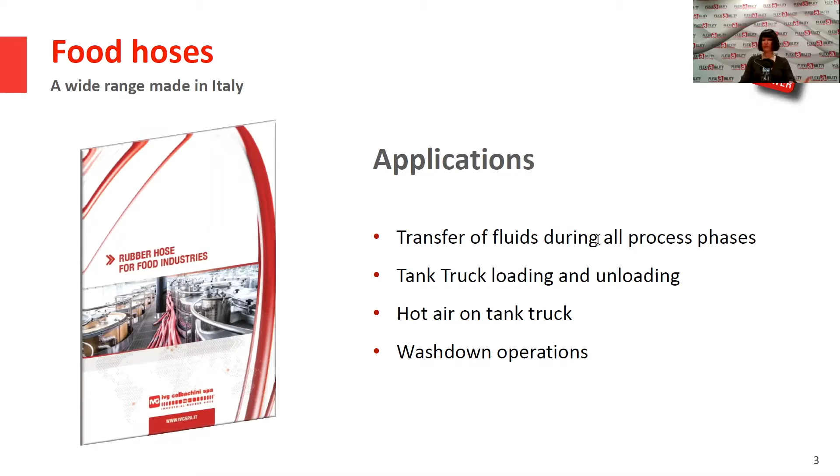We manufacture food hoses on mandrel for any kind of fluid and in all process plants. This means not only in production sites but also in tank truck loading and unloading. We also manufacture hot air hoses for tank truck wash-down operations and any other requests you may have.

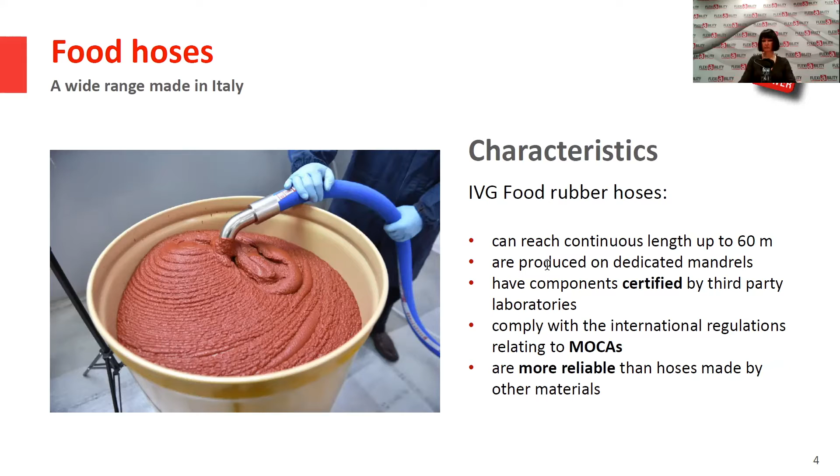Our hoses are manufactured on dedicated mandrels in a dedicated production department, which is very important because we can guarantee compounds certified by third-party laboratories complying with food regulations worldwide. Having a dedicated production department also means we can guarantee 100% traceability specific to this kind of hose, which is very important for food hoses.

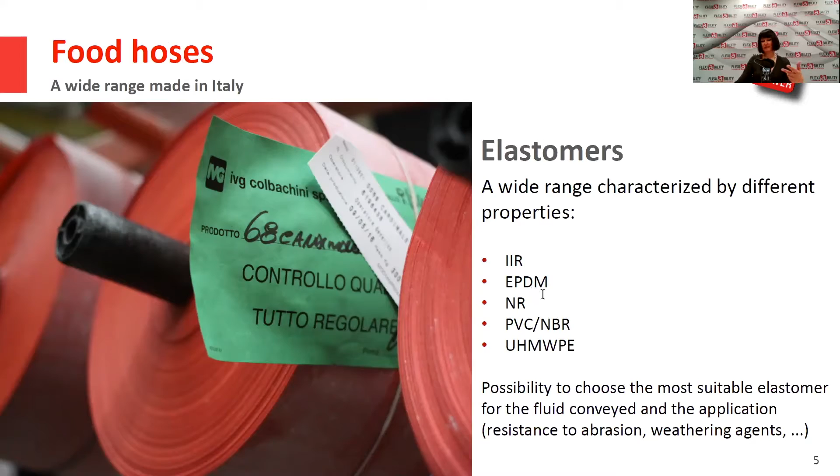We manufacture hoses with butyl, EPDM, NBR lining, and ultra-high molecular weight materials, among others. This depends on your needs, the applications, the temperature, and outside conditions such as abrasion resistance or weathering resistance. We normally talk about fluid conveyed, but the place where the hose is used is also important, as strong abrasion or weathering on the cover can cause problems later on.

Now let's go specific to cellar hoses, which are really top hoses for IVG within the family of food hoses. This is due to the fact that Italy, but also France and Spain, cover around 50% of wine production worldwide, which is a really important factor for us.

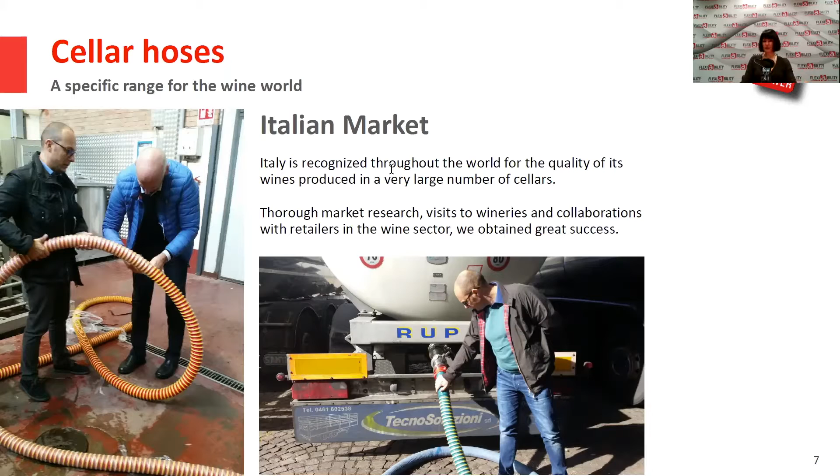We started from the Italian market, as it's right out the door, and there are an incredible number of cellars and vineyards in Italy. So we visited them and talked with the operators, and the most important thing we did was listen to their requirements and needs. Operators can have different needs, enologists others, cellarmen others, so it's really important to understand what they want.

In cellar applications there are many possibilities, as you can use hoses to transfer must, wine, during bottling operations, in the cellar, and others.

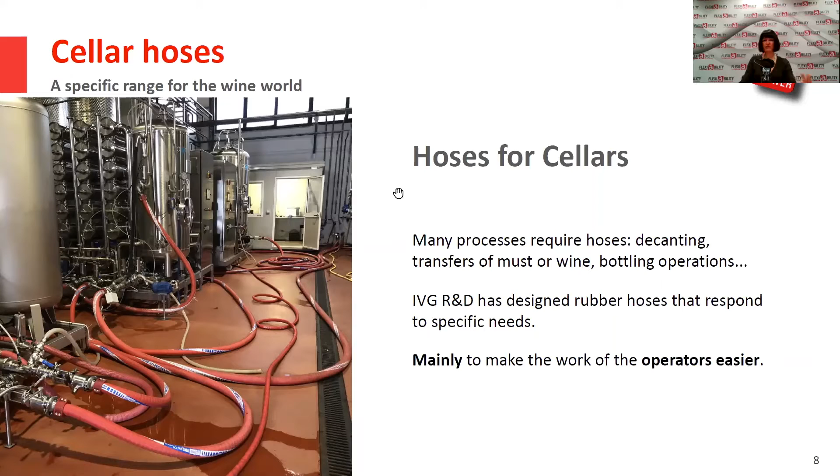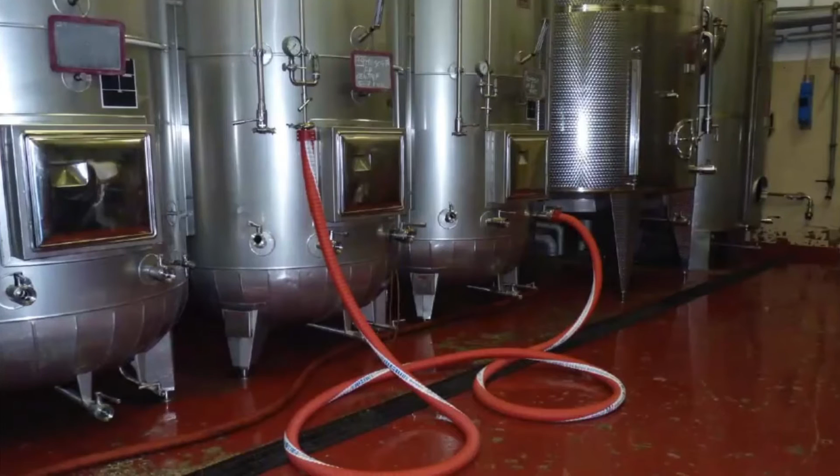Going back to the specific needs of the operators, let's say that the cellarman looked mainly at light weight, flexibility, handling, and stock availability. Why? Because they wanted a hose easy to move, to handle, and they wanted a hose ready immediately, without waiting, without wasting time.

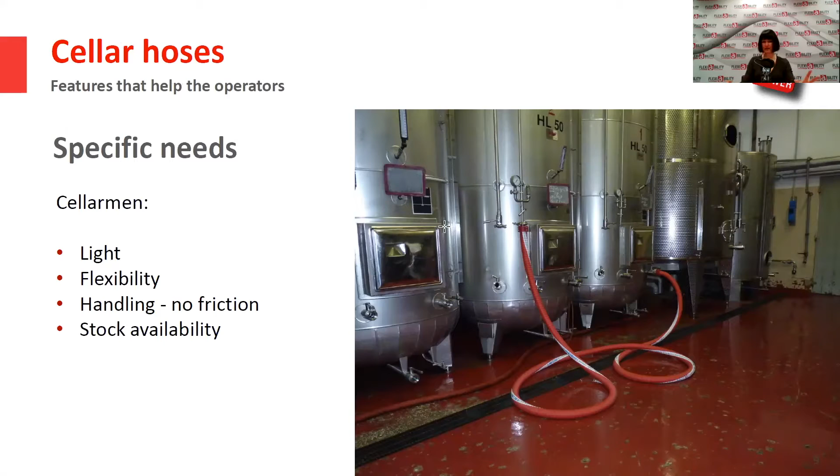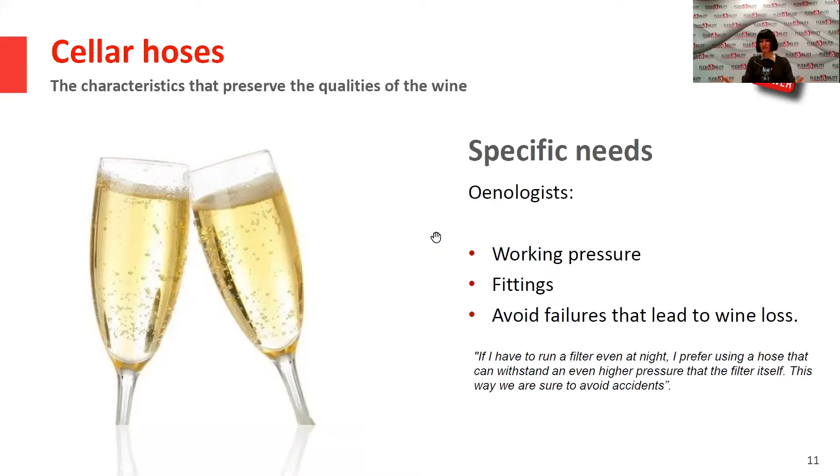While the enologists were looking mainly at food certifications, as they wanted hoses with no release of chemical substances from the lining, being tasteless and odorless. And not only this, they also wanted a hose withstanding a higher working pressure than that of the pump or the filter, and having a good fitting system. This is to avoid any failure during production, as any failure means wine loss. And this is something nobody would like to have.

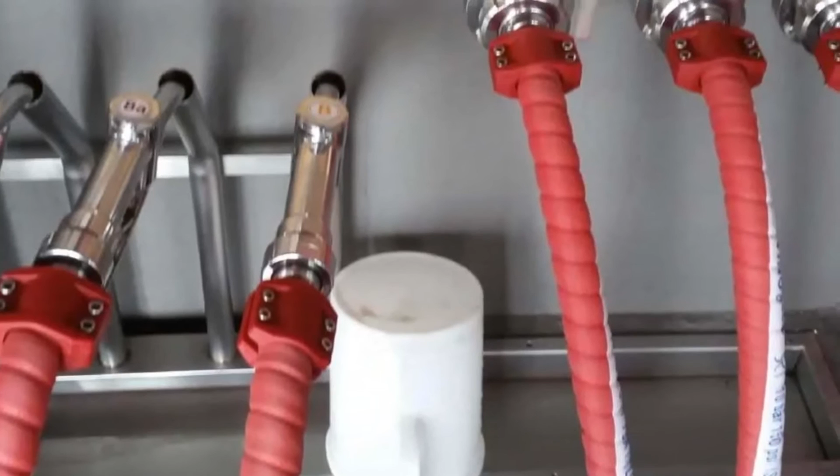So IVG, thinking about cellars and wineries, dedicated all its efforts to develop two hoses. One is Vinoflex Easy. Vinoflex Easy is mainly used in indoor service, as it has a low friction thermoplastic corrugated cover, which allows the operator to move it on the ground in the cellar without any problem, without any fatigue. It's really flexible, it's light, and it glides really easily with no force.

And let me say that the fact that it has a thermoplastic cover also helps the hose to remain clean, as a hose that is clean on the outside is very important. It's nice to see, and it really gives the sensation of something pure.

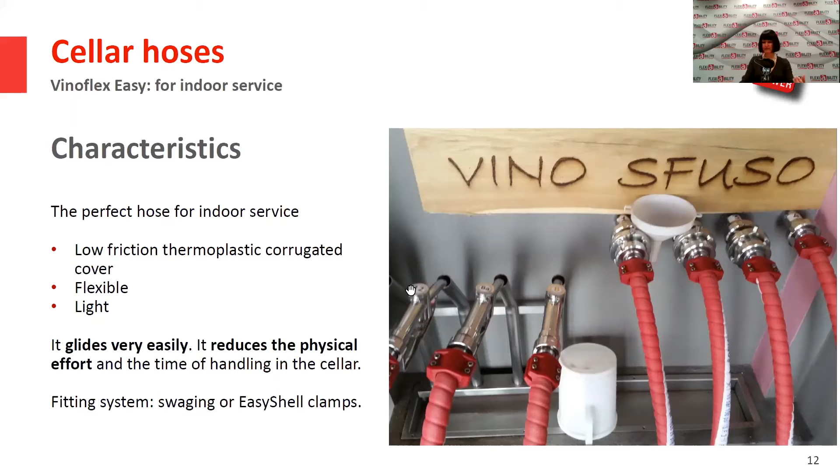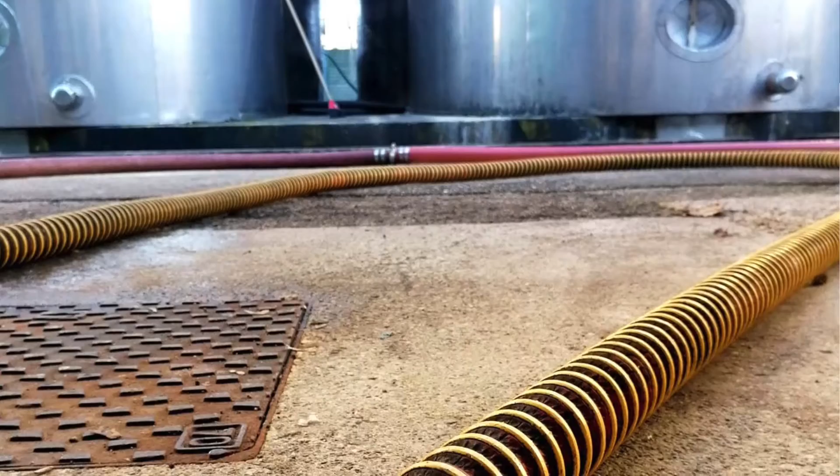And the other hose, which is used outdoors, is Tuscany. Tuscany is, as we have called it, the perfect hose for outdoor service. The cover is always in thermoplastic material, but it has an external thermoplastic spiral. This allows the operator to move it easily, reducing any force, and it is ideal for any kind of surface, even when the surface is abrasive or bumpy. So you can really move the hose without any twisting, without any knots, avoiding any kink. And it's really appreciated by the operators.

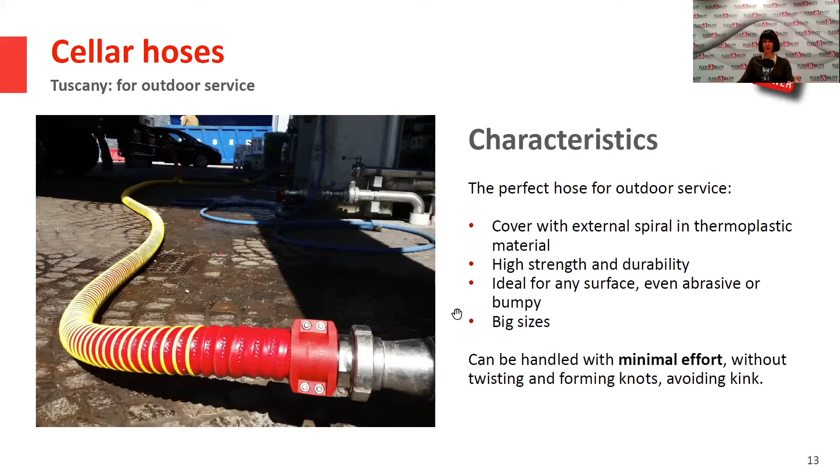Now, I'm very pleased to introduce this interview with Mr. Enrico Ronconi, who is the enologist of the winery Marchesi de Frescobaldi. Marchesi de Frescobaldi is a really important, very old and well-recognized winery in Tuscany. And from the words of Mr. Enrico Ronconi, you will really appreciate the feeling they have with our hoses.

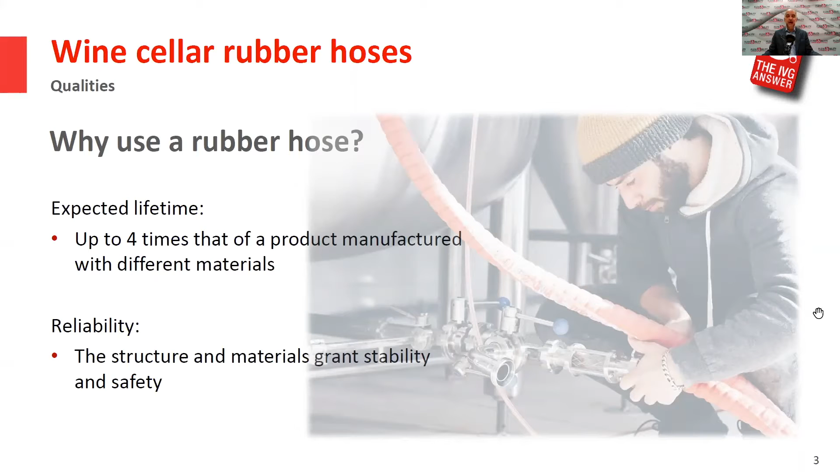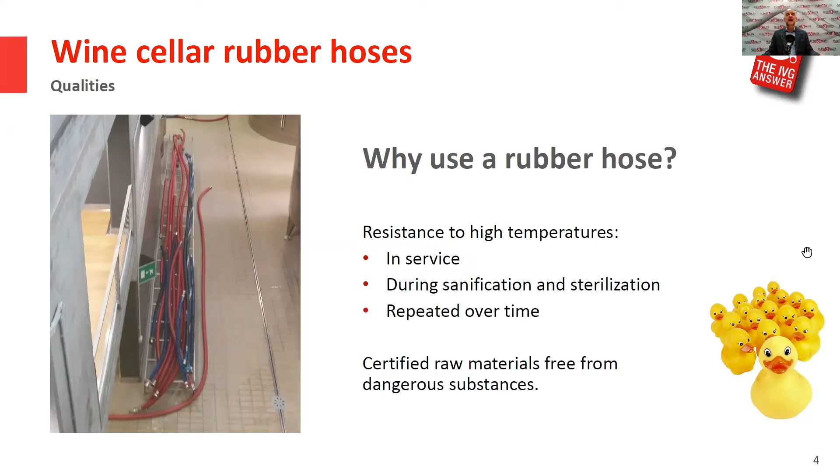There are many reasons to choose a rubber hose. First of all, the fact that it is absolutely free from any dangerous substances, certified by third-party laboratory. But we would like to underline the resistance to high temperatures, in service and during sanification and sterilization. And this resistance is extended over time. So these are not affecting the quality of the product.

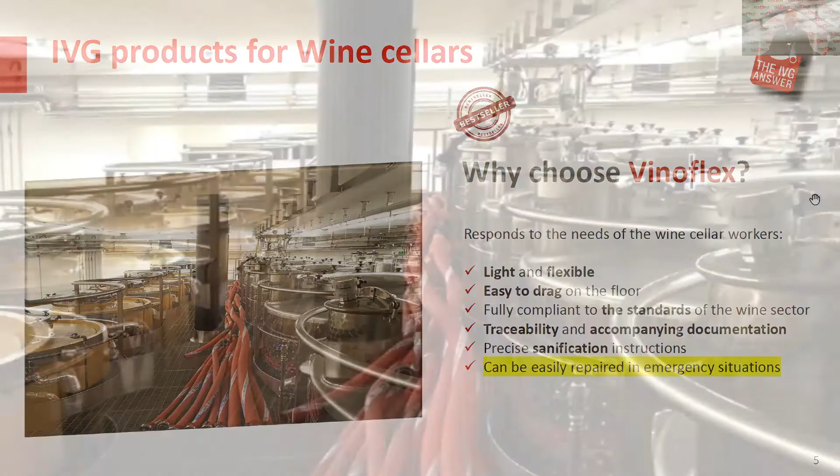Why and where to choose Vinoflex? Probably one of the best-selling products of IVG. The hose has been designed together with the cellar worker to work inside the plant. It is extremely light and flexible, easy to drag on the smooth floors that are available inside the cellar. It fully complies with the international standard required by the wine industry.

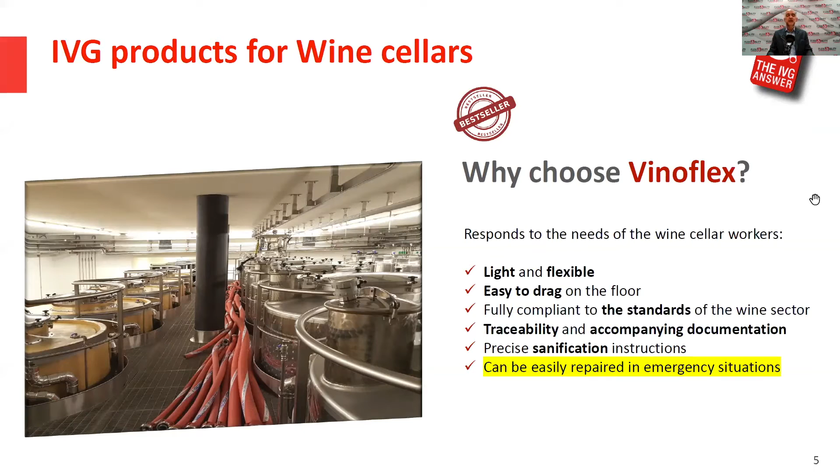It is supplied complete with all the necessary documentation, total traceability, instructions for a correct sanification, and most important, it can be repaired in an emergency on site. This is thanks to the clamping system designed by IVG, Easy Shell. My colleague after me will introduce you to this system.

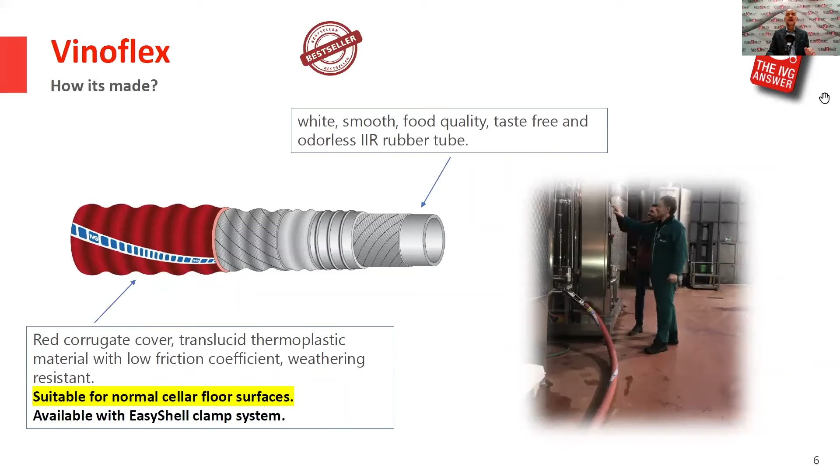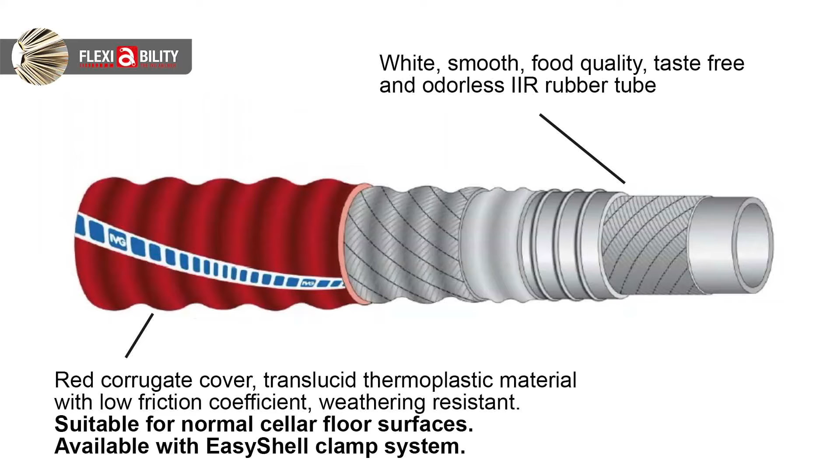How it's made. The hose is made with a first quality butyl rubber lining, absolutely taste-free and odorless. It has an embedded steel helix wire and a corrugated cover with a thermoplastic low-friction material that allows very easy dragging on the floor. It is available, as I said, for the Easy Shell clamping system. You can download the characteristics of the Vinoflex from the IVG website, but we can just give some numbers.

It is designed for a working pressure of up to 10 bar, which makes it suitable to work with autoclave wines that reach a higher pressure. It is extremely flexible. It reaches a bending radius equal to 3 times the inside diameter, and most important, this value can be reached with extremely minimum strength.

It's available in continuous length of 60 meters, and in a range of diameters from 1 inch to 4 inch, the diameters where IVG developed the Easy Shell system. Upon request it can be supplied with natural rubber lining, with different color covers, and with private branding.

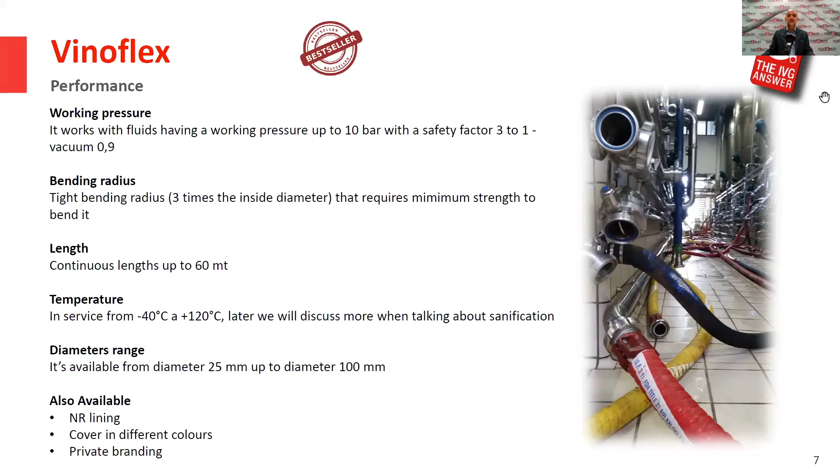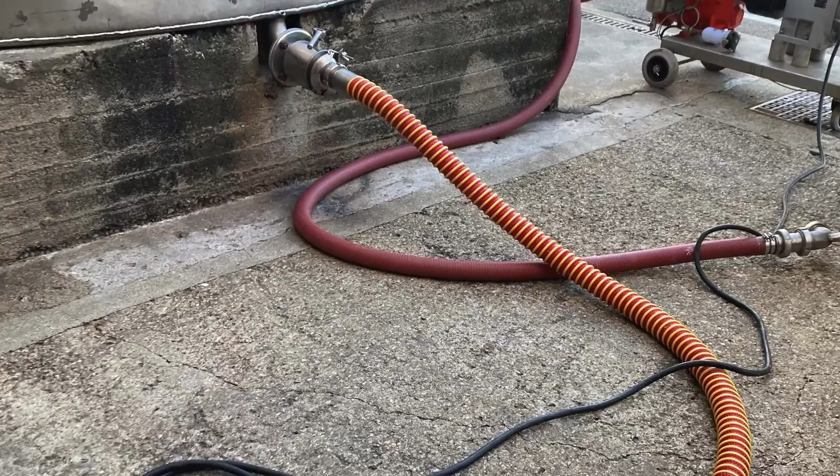The other product that we are talking about today is the Tuscany hose, designed for outdoor service. The hose glides on rough floors, concrete, asphalt, or other material. It's also extremely easy to bend. It's almost impossible to kink or knot. It is extremely light, and like the Vinoflex, supplied in accordance to the standard of the wine sector and with all the necessary documentation.

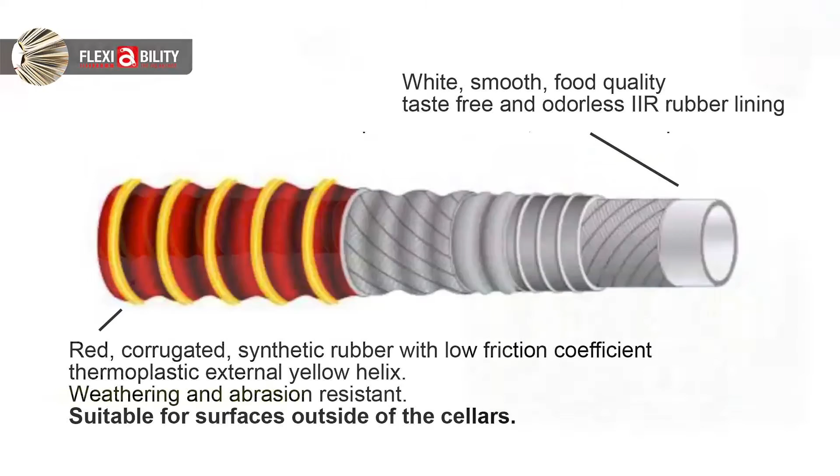This hose is made with a food quality, taste-free and odorless butyl rubber lining, embedded steel helix wire, and an external low-friction thermoplastic helix wire that makes it perfect for outdoor service. This is also suitable for 10 bar working pressure in continuous length up to 60 meters, but upon request, it can be supplied in service length complete with soft ends for easy assembly with any type of coupling and clamps, available, of course, in different colors.

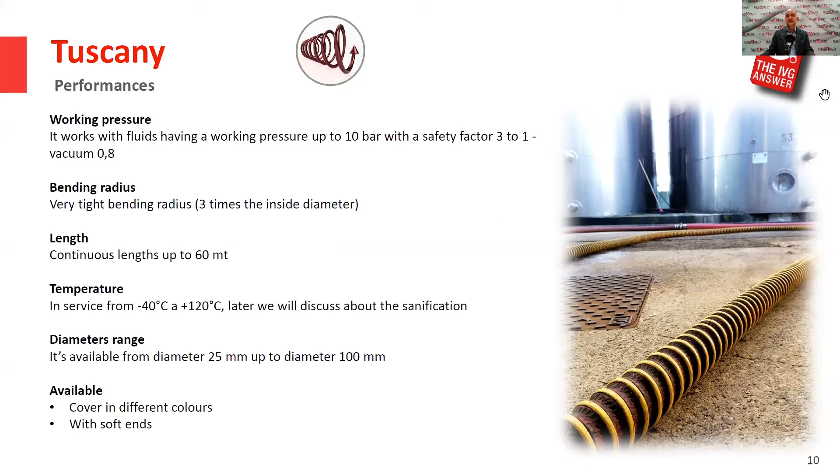Both products are designed in accordance to the international regulations, free from dangerous materials, phthalates, heavy metals, bisphenol, in accordance to international standards like FDA, BfR, Decreto Ministeriale.

An important sector, the cleaning, CIP, can be easily downloaded from the IVG website. If you go to the datasheet of the Venoflex, there is a section that you can download with all the instruction for cleaning and sterilization.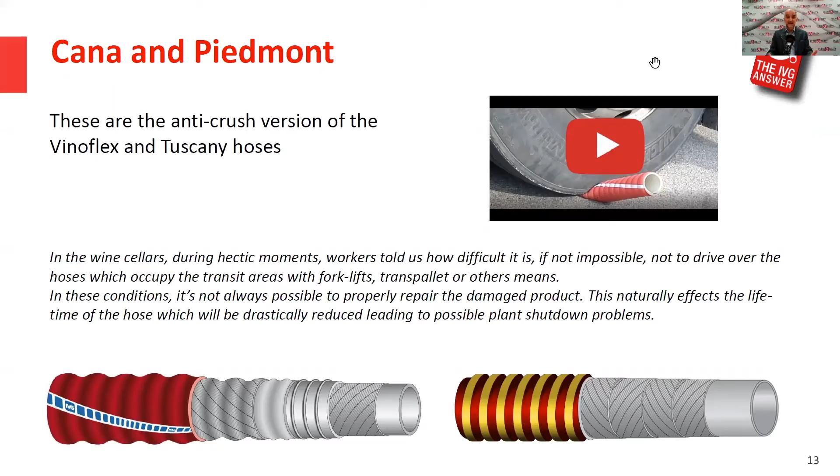Talking with the workers, it has been highlighted the difficulty of working in a cellar and how it's difficult to move in an area full of materials, and how easy it is to drive over the hose with forklift, transpallet trucks or other material, damaging in a way that cannot be repaired the product, causing shutdown of the production and different type of problems.

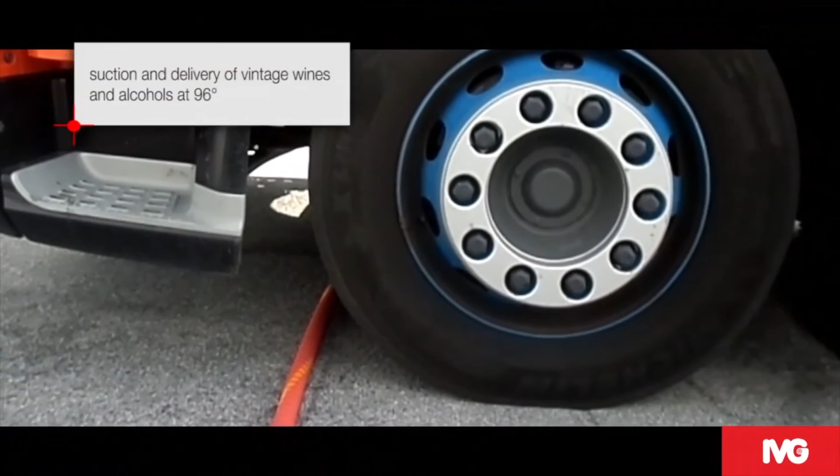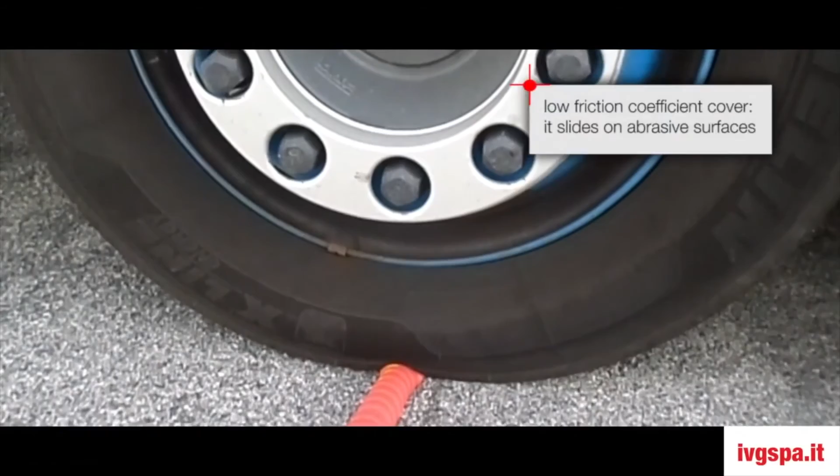For this reason, IVG designed the alternative crush-proof version, Cana, that is the alternative of a Vinoflex, with an embedded thermoplastic crush-proof helix wire, and Piedmont, that is the equivalent of Tuscany without the embedded steel helix wire. So a hose only with external thermoplastic wire that in any case grants resistance to vacuum.

All the characteristics of the product can be downloaded from the IVG website. We invite you to register in the IVG. You can download either the brochure, the data sheet of the product, either through sector, cellar, wash down, and so on, or family, food, hot, or other things.

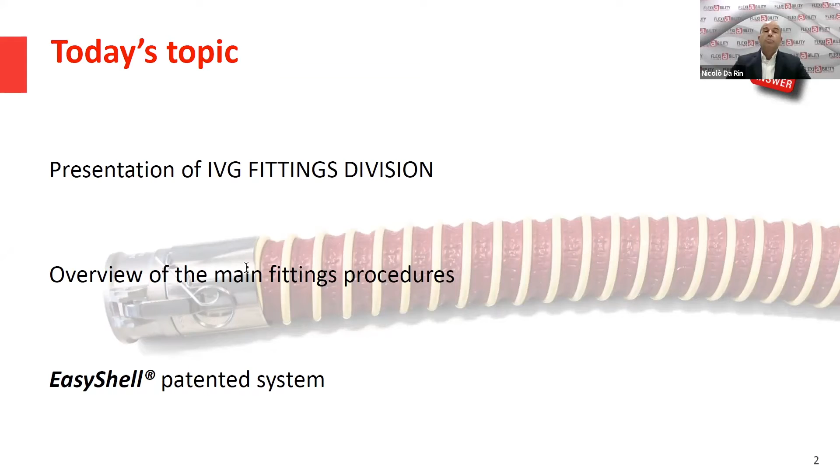The title of today's event is A Good Wine Needs a Good Hose. True, but a good wine needs a good hose with the right sanitary fittings. This is why I'm going to present you our company, Fittings Division. We will also have an overview of the main fitting procedures, and I will also present our EasyShell system.

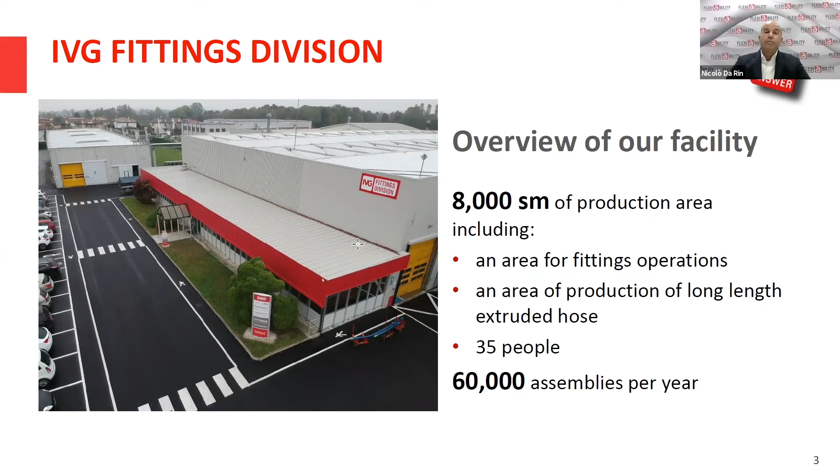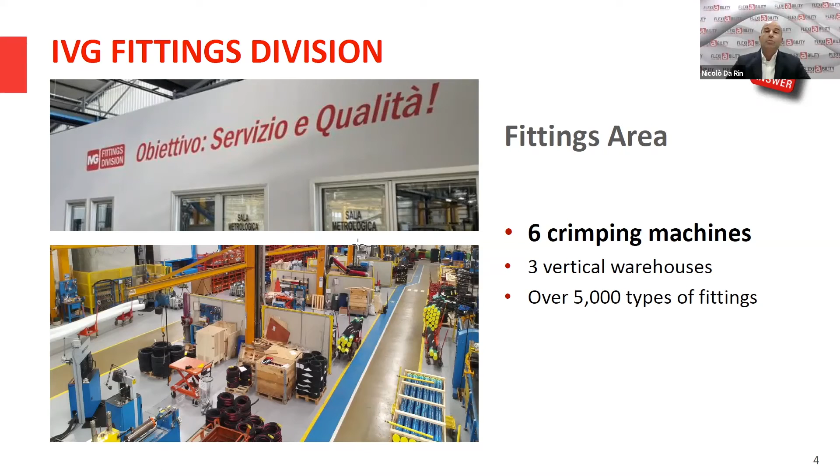Fittings Division covers an area of 8,000 square meters, divided into two main activities: the area for fittings operation and the area for the production of long-length extruded hose, for a total of 35 people. Fittings Division can perform roughly 60,000 assemblies per year. We have 6 crimping machines, and we can crimp from size 6 millimeters to 500 millimeters, so from size 1/4 of an inch to 20 inches. We have 3 vertical warehouses in order to save space, and we can deal with over 5,000 types of fittings.

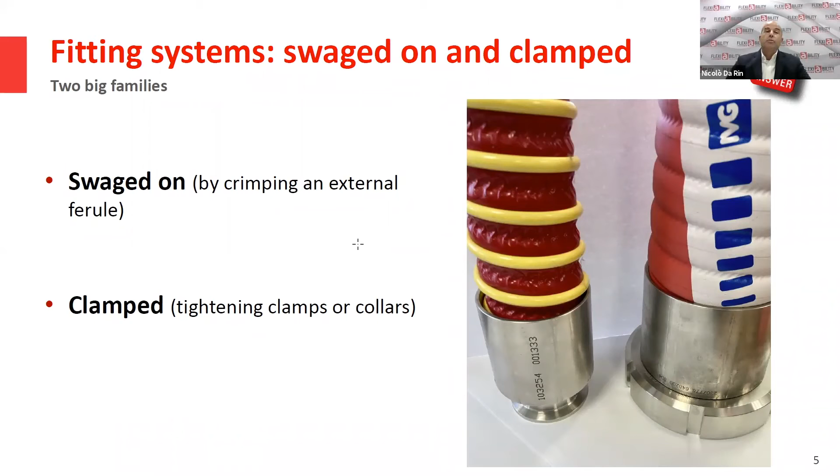I'm going to present you now the 2 main families of fittings. So swaged or crimped by an external ferrule, or clamped by tightening clamps or collars. Swaged: the plus is certainly that it is a permanent system with an external ferrule. It is excellent in case of higher pressures. The minus is certainly it cannot be performed directly by the end user.

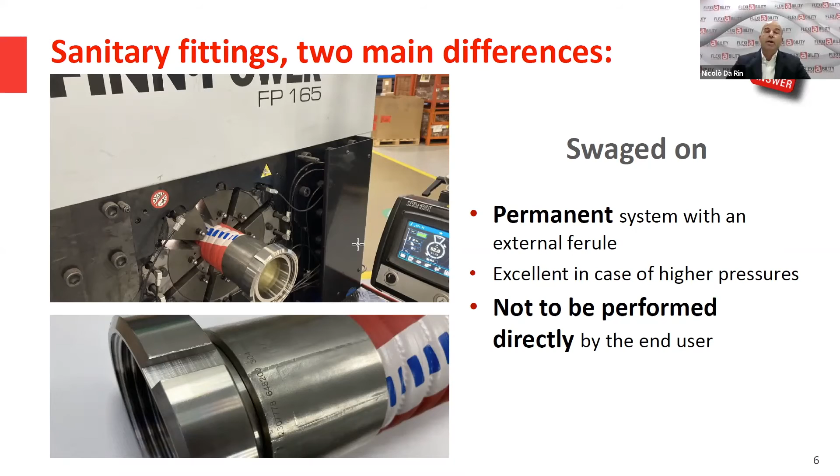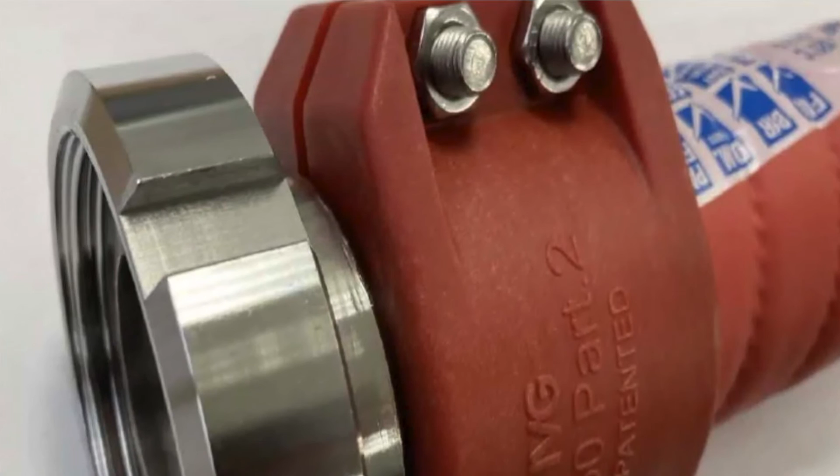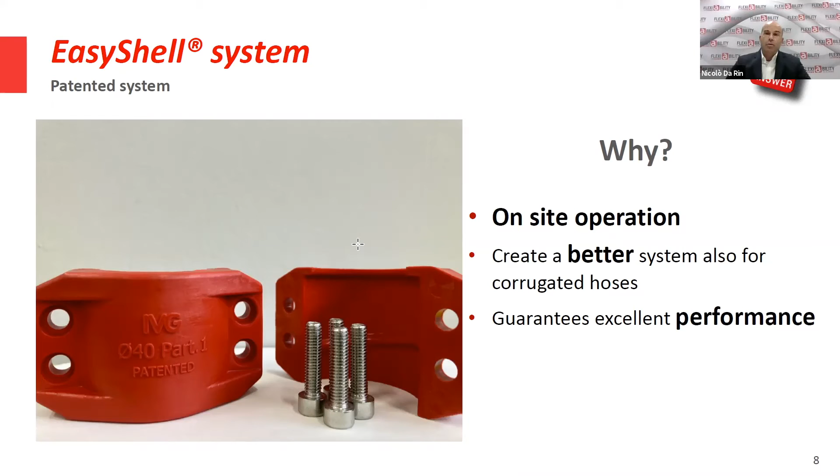Clamped: it is mountable and removable with half shells. It can be performed on site by the end user. So this is the plus. It is just easy to use. EasyShell system has been patented by IVG several years ago. Why use EasyShell? Again, on-site operation. It creates a better system also for corrugated hose. This is something new. And it guarantees excellent performance.

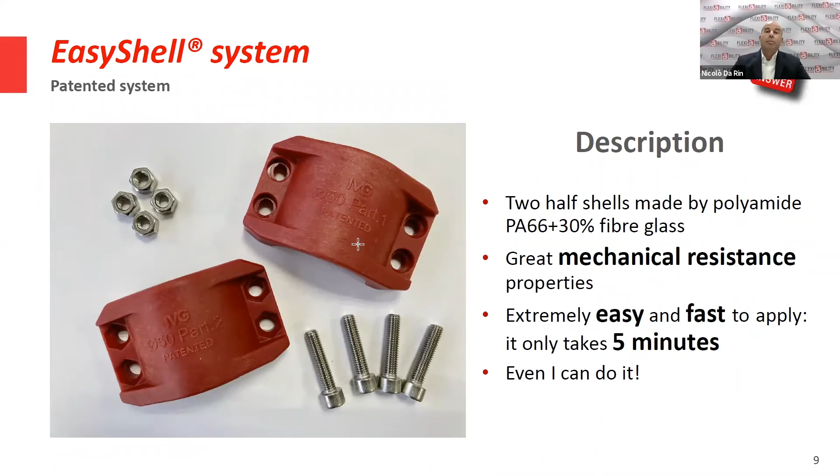EasyShell system is a system with 2 half shells made of polyamide fiberglass. It has great mechanical resistance properties, extremely easy and fast to apply. It only takes minutes. Even I can do it, so it's very easy. Why this system? Again, cut upon need. You can cut the length that you need. It is simple, light, reusable, and it can be used on a wide range of sizes.

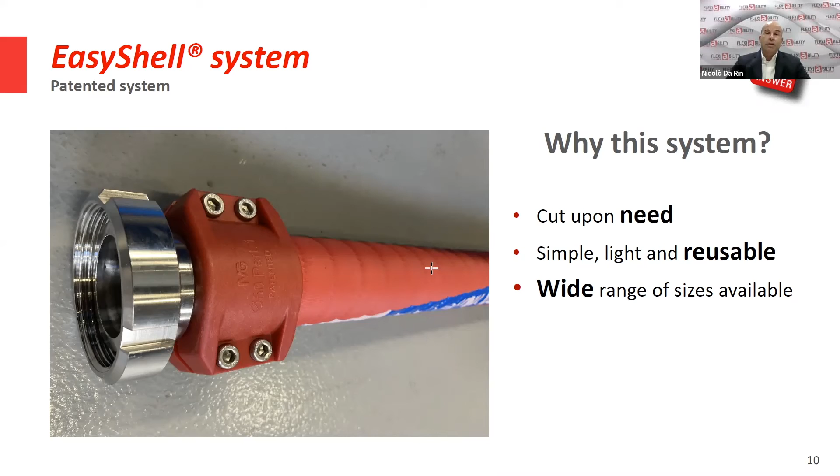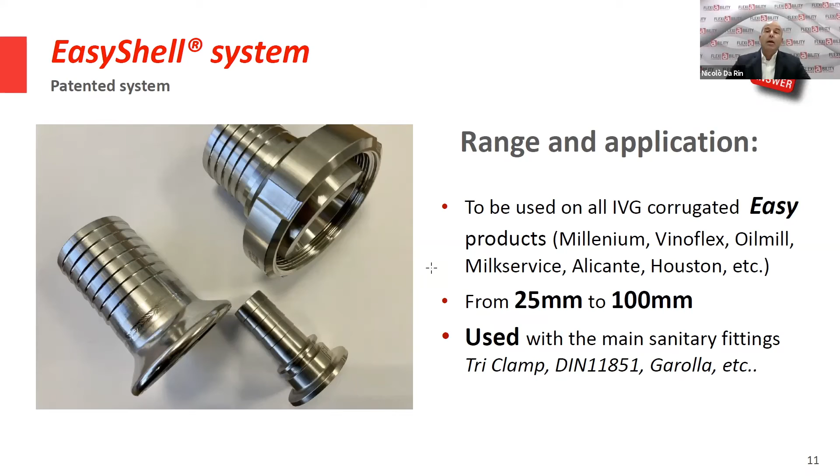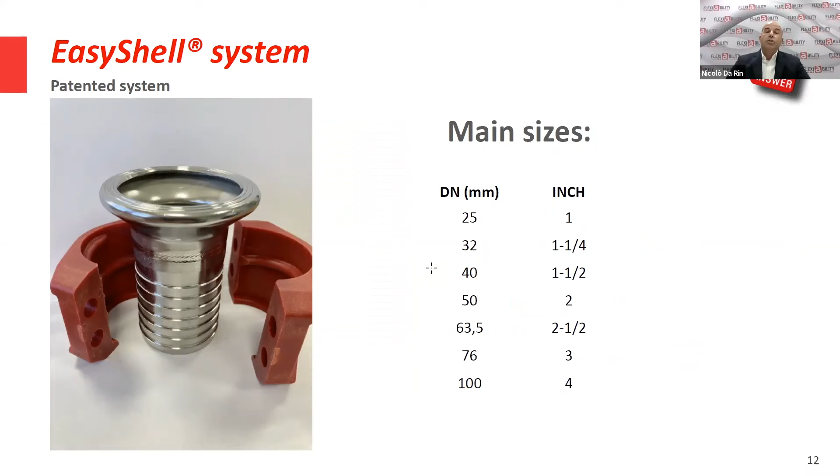It can be used on all IVG corrugated products, mainly food grade products, but also some industrial hose, from size 25 millimeters to 100 millimeters, so from size 1 inch to 4 inch. It can be used with the main sanitary fittings that we can supply. So sizes are from 25 to 100, 1 inch to 4 inch. So that's it for me today. Now please take a look at our tutorial on EasyShell system.